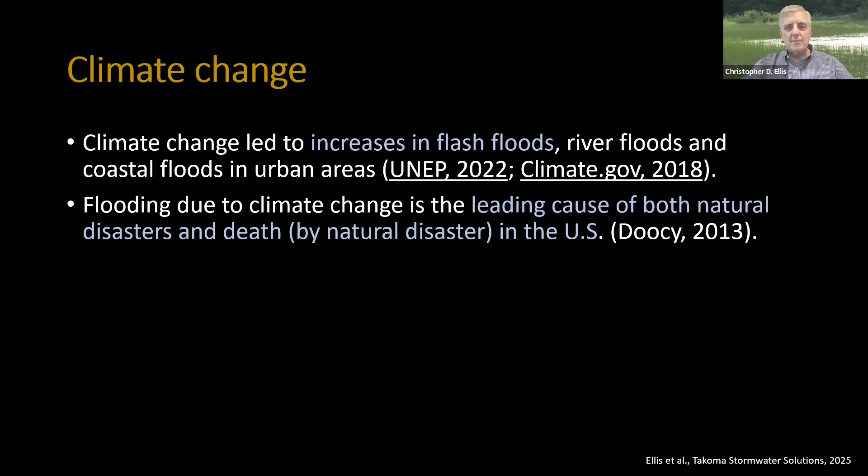So just some preliminaries that everyone is aware of: climate change is increasing the flash floods in the United States, and flooding is a leading cause of natural disaster and death by natural disaster in the United States, although heat-related is probably close to matching that at this point. And some other things: of the 34 storm-related disasters in the state of Maryland over the last 70 years, nearly half of those occurred in the last 10 years, right?

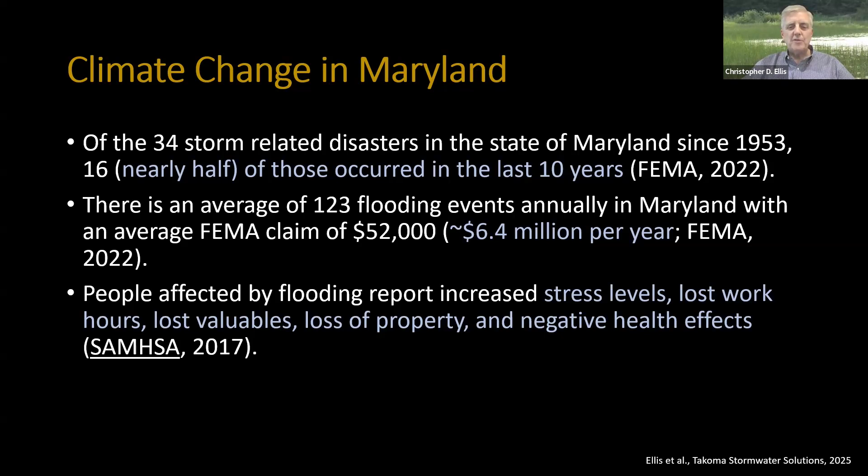So that's just talking about the fact that they're coming faster, and our numbers are going up in terms of precipitation. There's some numbers about how many FEMA claims there are in Maryland, as well as some of the reported effects, stress levels, lost work, lost valuables, and so on, that people report. So the work that I've been doing is taking modeling, in this case a model called WinTR-55, to just do some basic small watershed modeling for a community called Broadway East up in Baltimore. And to be able to take those numbers and visualize it so that people who are non-technical experts can understand it. Want to kind of bridge that gap, so that everybody has sort of an equal hand in the discussion.

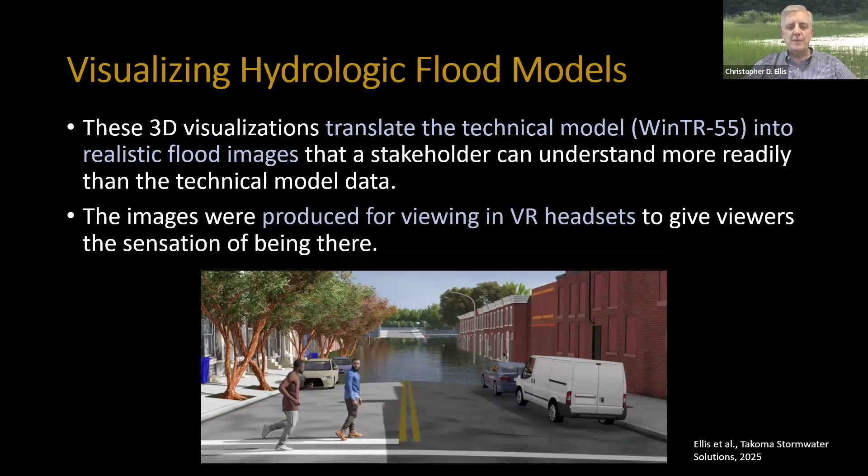And we're not just relying on a small subset of people to tell us what's going on. We believe that the 3D visualizations can translate the scientific modeling effectively, and that if you view it in a VR headset, which of course we can't do tonight, but I'll try to do my best to virtually do it. But using VR headsets to give people a sensation of actually being at these floods. It's different than seeing it on a screen or on a poster on the wall.

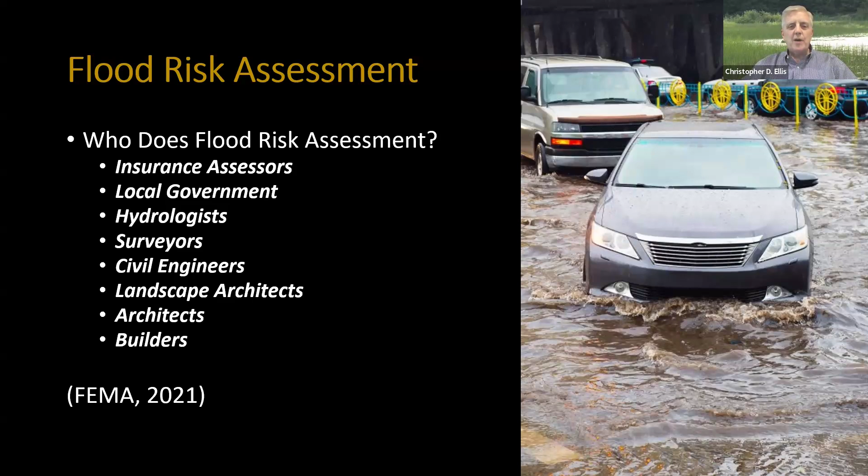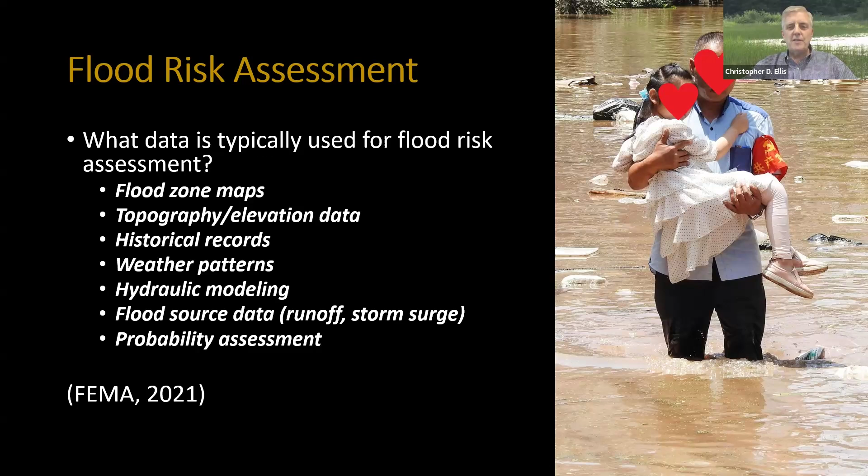So who does flood risk assessment? That would be insurance assessors mostly and local governments. The rest on this list are all professionals who are involved in doing the actual modeling for the flood assessment. And then what type of data is used? Typically flood zone maps, topography, elevation data, historical records, and so on. These are very helpful. And if you're a modeler, I do modeling, you really need all this information, but it's difficult for most people in the public to look at these things and really understand what's happening at the ground level or at the site level.

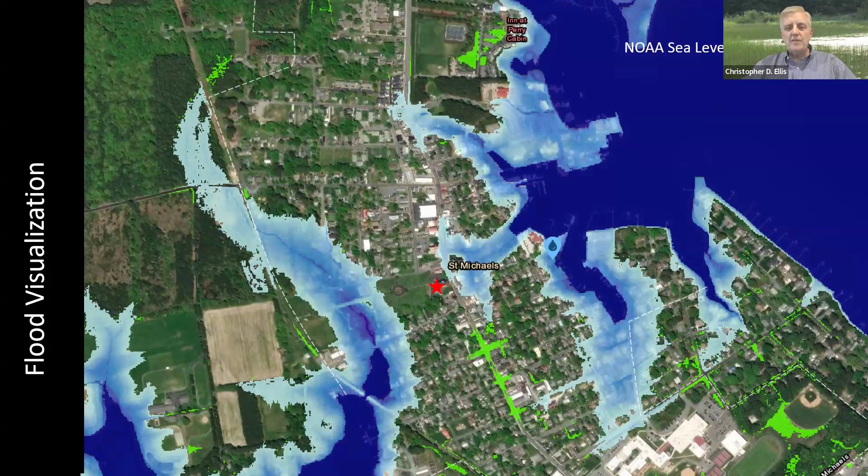This is flood visualization with the NOAA sea level rise viewer. This was taken down at one point, but it's back up again. So you can still see this. The problem with this is it's really good for regional level work, but at the site level, at a building, I mean, you can pick out buildings in here, but not really understand what's going on at the ground level. So that was St. Michaels on the Eastern Shore.

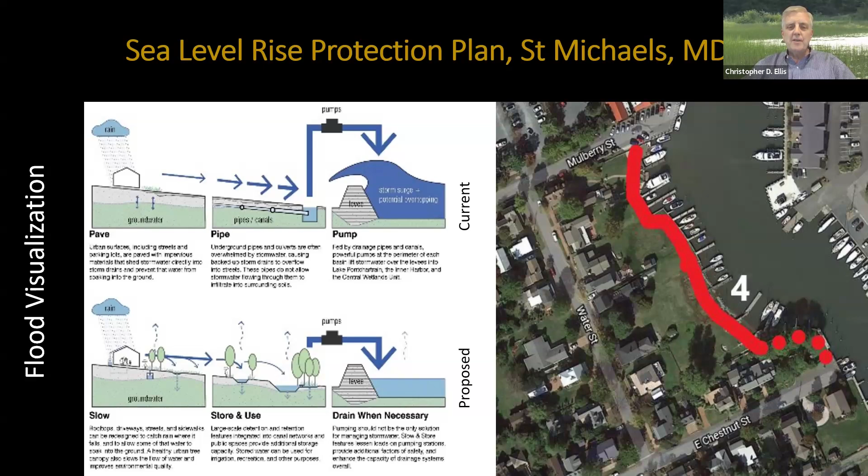And this is from a report for St. Michaels in 2020. And this is kind of the level of visualization that you can get from that report, an indication of where a berm would be. And you can see pretty high resolution from the air where the buildings are. And so you might recognize your backyard if that's your house on that street. And then on the left, these section elevations, which are pretty generic. They're really not designed from anybody's backyard here, but just to get a concept across. And they're helpful to a point, but still, I think, not as helpful as they could be.

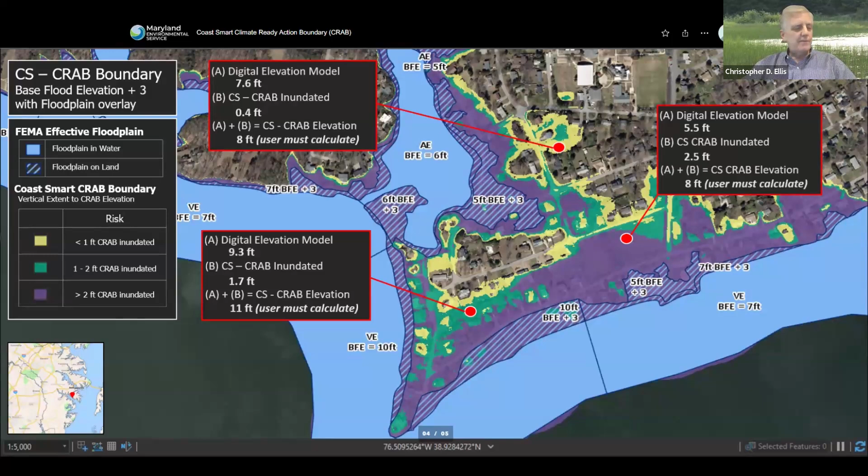This is the flood mapping that you can get from PG Atlas, Prince George's County online GIS viewer. I'm actually doing work on this area for them as we speak, and then this relatively new kind of mapping system with more information that you can get. But still, we're looking at a mapped image. And the houses are pretty small. And if you're good, you might be able to find your house in there if you lived in this area. But still tough to understand.

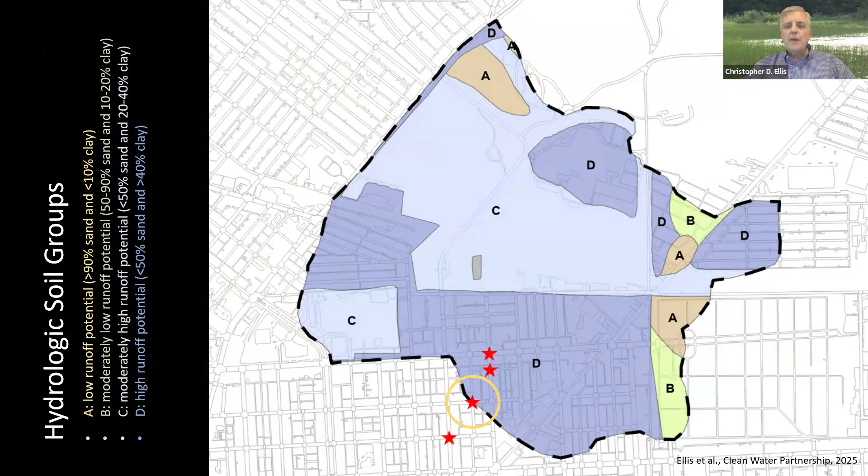So one of the first things you do is identify the soils, because the soils will tell you how much you can expect water to infiltrate or not. If it's sandy soils like the A soils, you'll get a lot of infiltration. If it's D soils, it's like clay. It's no better really than a parking lot. We won't get much infiltration from that.

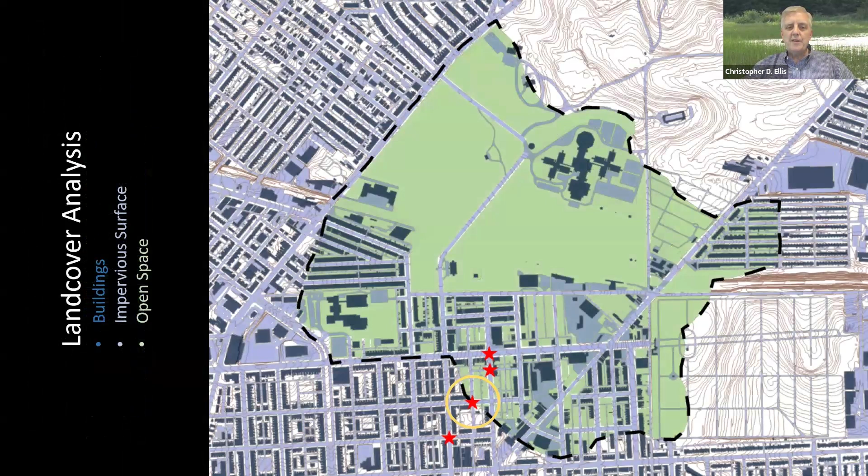And with that, we add the land cover. So you see buildings or rooftops in here, impervious surfaces, and open space. And those can help. This image here is the same as the previous one, except you can see an aerial photo behind it. And so it's telling you what the quality of that open space is. And with that, we can then start to plug that into this model.

So the model is looking for, if you can see across the top, A, B, C, and D. These are the soil types, hydrologic soil types. And then the land cover is all on the left side here. And what we need to do is figure out how many acres of this type of land cover is in this soil type and put those acres into this model. So it's a bit of a black box, but if you understand the data that's going into it, you can kind of understand how the model is working.

The next step is to identify the time of concentration. That's the amount of time it takes for the most remote drop of water to get to the confluence point where you have an outfall. So we want to know the longest possible time that it takes for a drop of water to get there. Because once that happens, as long as your rainfall is continuing at the same rate, the entire watershed's going to be saturated, and you'll be getting your peak flow coming through that spot.

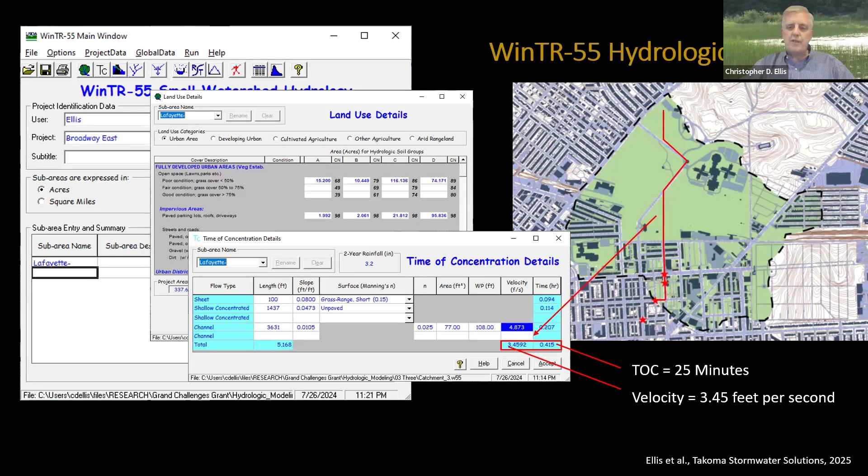A couple of things that you can get off of this is the time of concentration here is less than half an hour, this is in hours. It's actually 25 minutes, which is pretty flashy. And also the velocity of the water is 3.45 feet per second. If you've ever stood in water that's moving at 3.45 feet per second, you're not standing, actually, you're probably swimming.

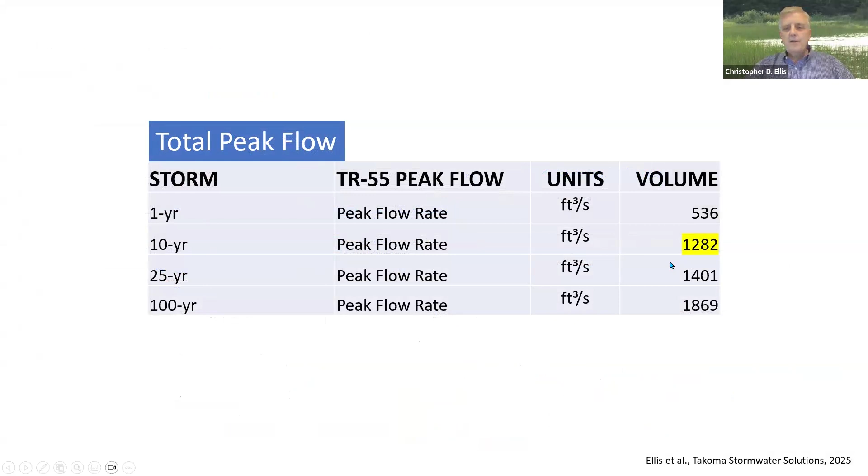But we do have pipes under the ground. And the pipe in this intersection is actually 96 inches, which is 8 feet. A grown-up can stand in that pipe and reach out their arms in both directions and not touch the ceiling or the walls, right? So it's a big pipe. It brings a lot of water.

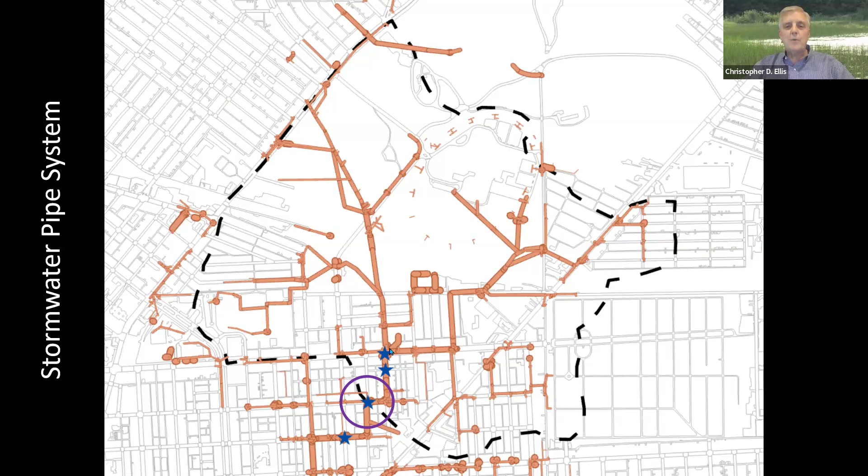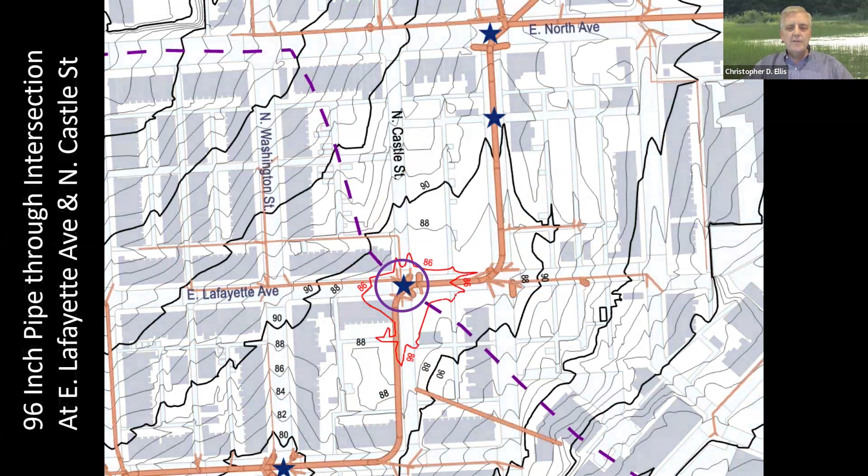The other thing about this intersection is it is a depression. So when you see a closed contour like this 86 contour, it's either going to be a peak, like a summit with the contour around it, or it'll be a depression. In this case, it's a depression, and the depression has to fill up before it can spill out and go down. So we zeroed in on this one because we knew it was particularly problematic. So there's the pipes underground and the intersection.

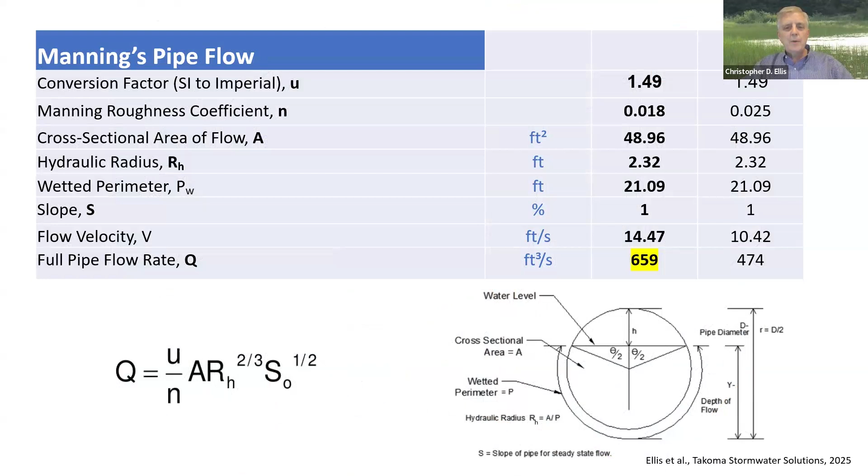And so there are a number of different ways you can model the pipe flow. This is the equation for Manning pipe flow. There's also the Hazen-Williams, and we actually used the Hazen-Williams. So this is a big table that really can be summarized as total peak flow. This is the modeling that we did at the beginning with 1282, plus the underground pipe flow, which came out to 738, is the volume that we're using.

And so if you subtract the pipe flow from the total peak flow, you can get the surface flow, which is in this case 543 cubic feet per second. Okay. And remember back that the velocity was 3.45, and it's just pure luck that these numbers are backwards, 2, 3, 4, 5, and 5, 4, 3.

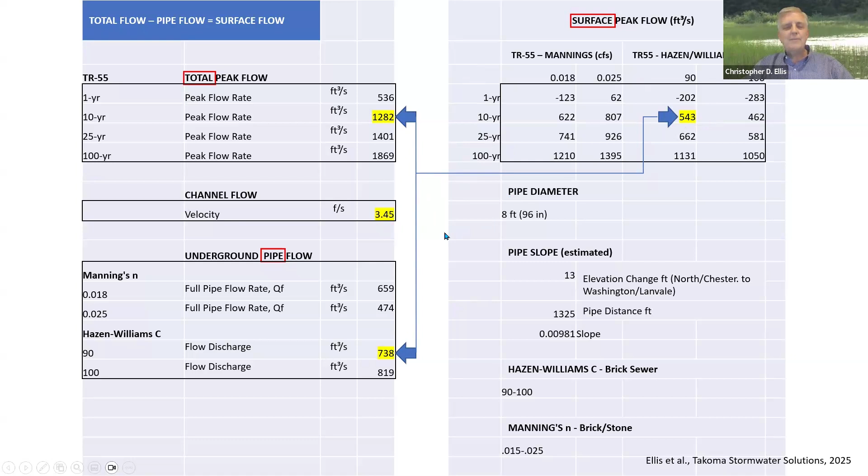I do this again, it'll never happen, but it's helpful to remember. So the next step is to figure out how does this translate into a floodplain? So you've got sort of a base at the top and then a depth to it. And so really all you have to do is take your peak flow in the simplest form, cubic feet per second, and divide it by your velocity in feet per second. That gives you square feet, okay? And that's the cross section that we're going to be looking for. The cross section here is 157 square feet, but I'm simplifying it down to 150 for the purposes of looking through the slides that are coming up.

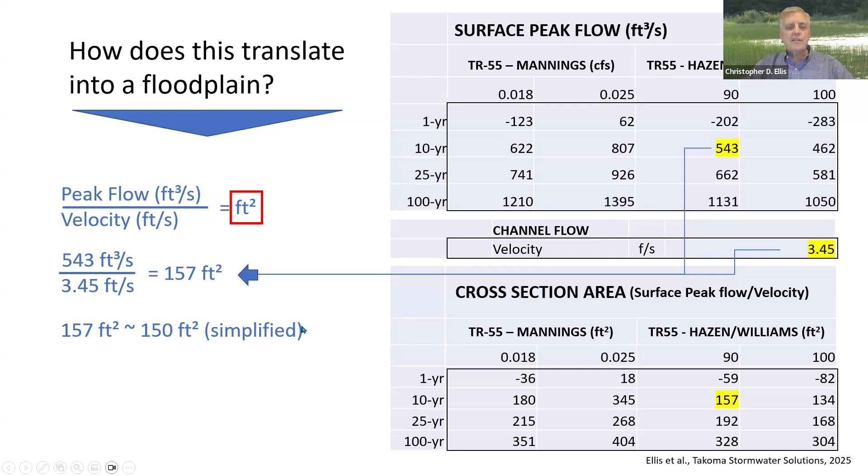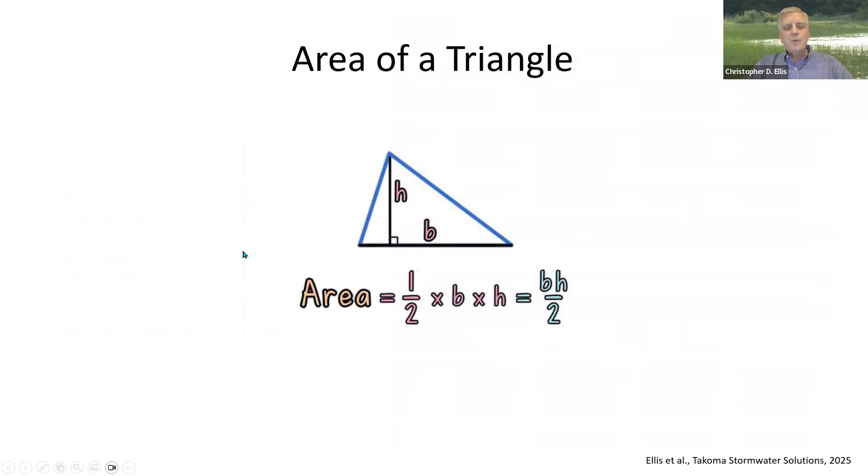So area of a triangle, for those of you who haven't been in a math class for a while, is 1/2 times the base times the height. And so we do this. Here's our base at 300 feet and our height of 1 foot with the area of a triangle, base times height divided by 2. That gives 150 square feet. So that's about the size of the floodplain that we're looking for in that neighborhood. Or if it's 150 feet across, then it would have to be 2 feet deep.

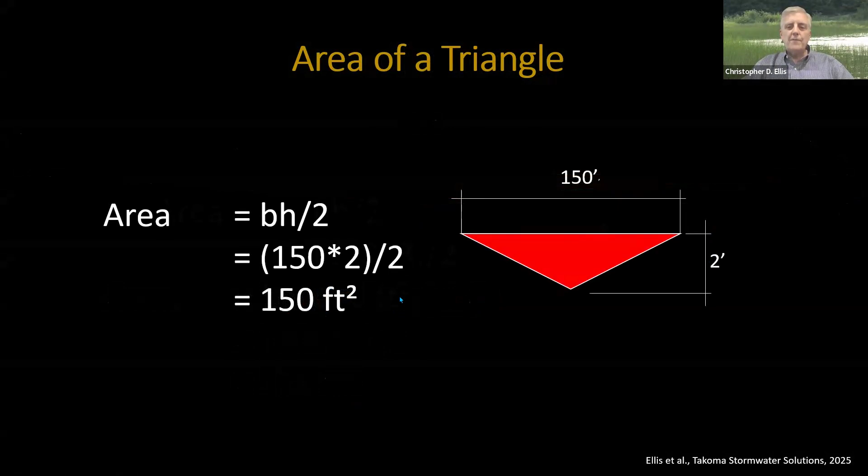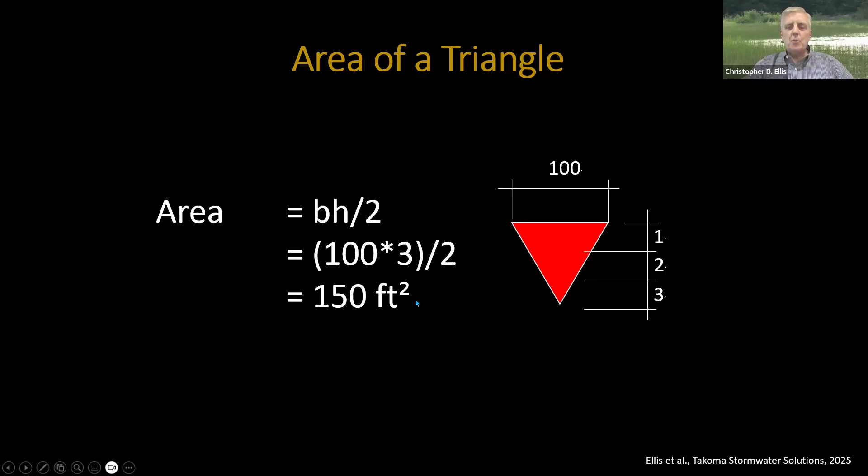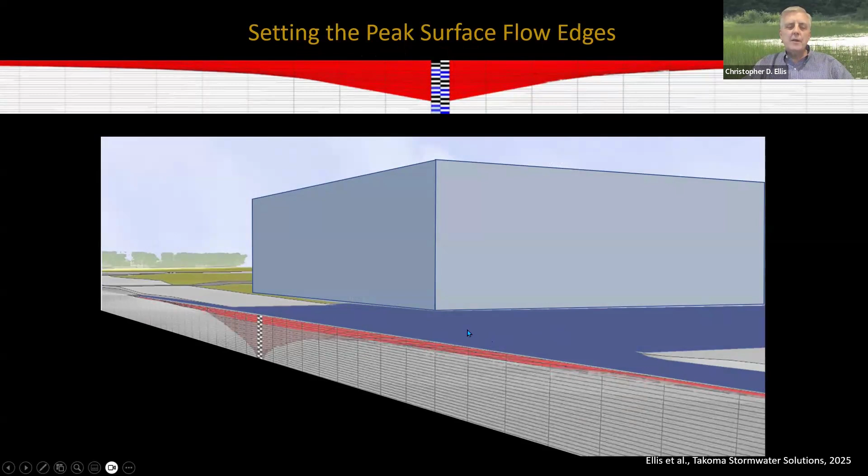And that would give us our 150 square feet, or at 100 feet and 3 feet deep, we would also be at 150. So that gives you a sense of how your water column going through might change a little bit. And you can then use that to build a graphic like this one that can help you as you move it through your modeled landscape to get close to where those tops are, and the top of the water. And in reality, you really need to take a complete cross section. So this is an actual cross section from the model that you'll see in a second. And this adds up to 257 square feet.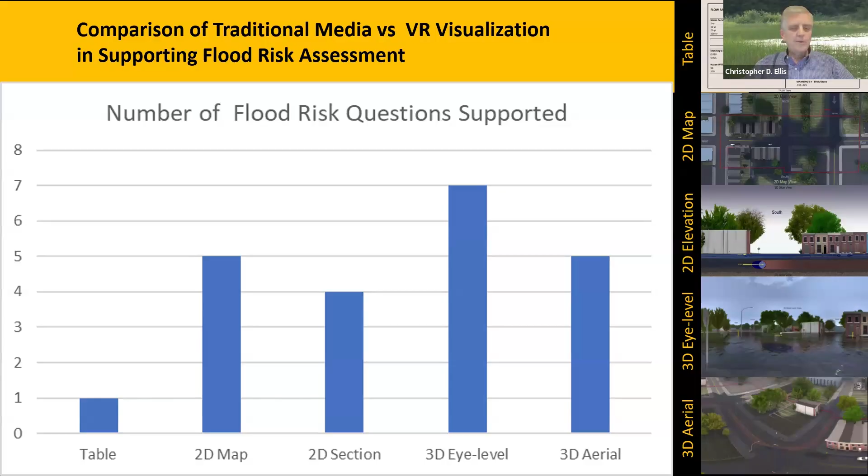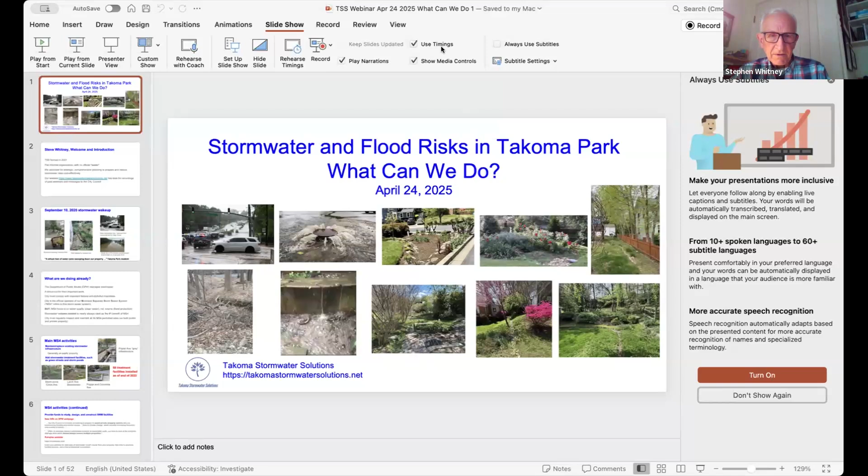Okay, thanks very much, Dr. Ellis. I hope people appreciate the complex data that is handled in one of these models, and it's important for, I think, our city to understand that if we wanted to do something like this, collecting data is very important. But the beautiful thing is that this is technically possible. It's been done in Baltimore. It could be done in Takoma Park.

I know that some people on the city council, for example, have said, I wonder what it would look like if we had a 100-year storm. We know that it is possible to do this. It's just a question of making it happen, funding and so forth.

Let's see. Are we able to fill the screen yet? Or I guess, okay, I guess we're here where we want to be. All right. We're going to just wind back a bit and just again welcome you to the webinar. And Rob, can we just move on to the next slide? Okay.

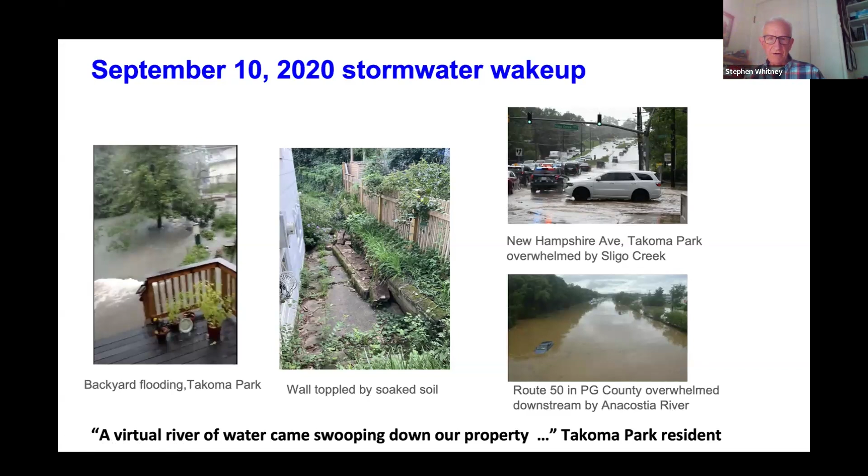Rain expected to drain through storm sewers gets blocked for various reasons and ends up going downhill over roadways, yards, parking lots, and wherever the surface is saturated or impervious. Could I have the next slide?

Our main MS4 activities are maintaining existing stormwater infrastructure. That's the gray infrastructure that we hear about. There's a picture of a little detail of gray infrastructure over on the right. This is Poplar Avenue under a part of the street that I didn't know had a storm sewer, but there it was. It's being worked on right now.

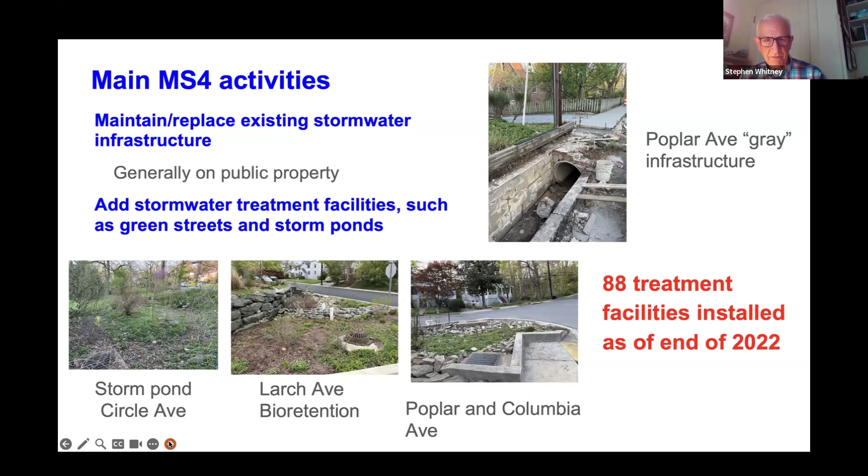But the city has installed a lot of treatment facilities that use some nature-based processes, and I've just shown you a couple of them. They've put in 88 of these, and that's a lot of work. At Takoma Park, the Department of Public Works has been very proactive with this approach. Could I have the next slide, please? Now, the problem with that approach is that it's very expensive.

TSS does not have the solution, but we do believe that some changes in city policy are happening that are very promising. New information on the webpage says that the city is looking at addressing stormwater issues on private property. And even better, they're exploring ways to support projects on multiple properties. That way you can cover more ground with a single project. That's a breakthrough because it may incentivize neighbors to collaborate on solutions. And one of the themes that you'll hear through the presentations tonight is the importance of collaboration.

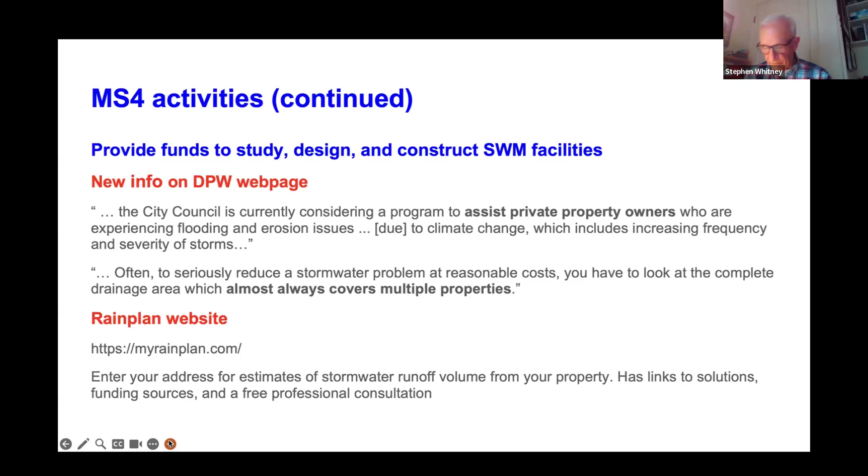The city has also worked with an organization called myrainplan.com. You can look at that rain plan website. You can enter your address. You can get an estimate of stormwater runoff from your property. And it also provides links to solutions, funding sources, and a free professional consultation. TSS really has not evaluated that in any depth, but it's available. Okay, could I have the next page, please?

Something to explain is that our city covers stormwater. The county is responsible for flooding. I don't really know what the specific legal definitions are, but the one thing that we do know is that the county is collecting really important data that would be of use for the city for a comprehensive stormwater management plan. And that's one of the things that TSS has asked the city to get to work on.

The city has done a lot of work on individual problem sites. That's important. The proactive 88 nature-based sites, bioretention sites, and swales and things like that. But we don't really have a plan, and the kind of data that we get from the county should be a really big plus for us.

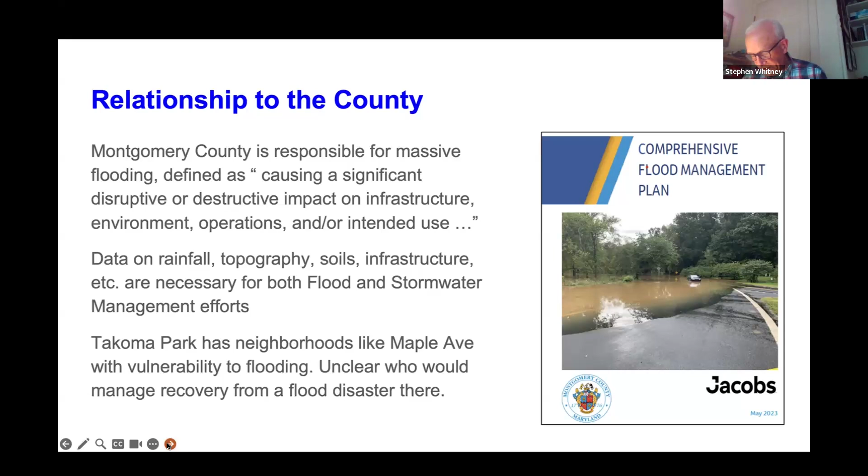Now, let's move to a presentation by Mike Lynn. Mike is an ecological designer and founder of Eastern Ecosystems. This is an environmental consultancy. Mike has years of experience. He's an articulate advocate and practitioner for nature-based solutions, and he's going to cover the general principles of nature-based solutions and how that intersects with the gray infrastructure that is the traditional way of dealing with stormwater. So, Mike, let's go to the next slide and let Mike take it from here.

Mike, can you get online? Hi. Yep, I'm here. Does everybody hear me okay? Yes. Fantastic. Perfect. Well, thank you for the warm introduction. Happy to be here. Excited to be here. Although that is going to be a tough act to follow, Dr. Ellis. That is some very cool stuff that you're doing there, and I look forward to seeing how that continues. And I know we're a little short on time, so I'll go through this a little quicker, because if you gave me all hour, I would nerd out on this for the next 3 hours. Go to the next slide.

So as you said, ecological design, nature-based solutions, what does that all mean? That means at its base, we look to the natural systems that existed long before we started building and say, okay, not to anthropomorphize nature, but how has nature solved these problems? Because chances are nature's been here a long time and has a very effective, efficient way of doing that. So can we take those natural patterns and processes that nature uses and either copy them, build up ecosystems in our communities, or at least take the processes and patterns and institute them into some of the designs that we work with? Next slide, please.

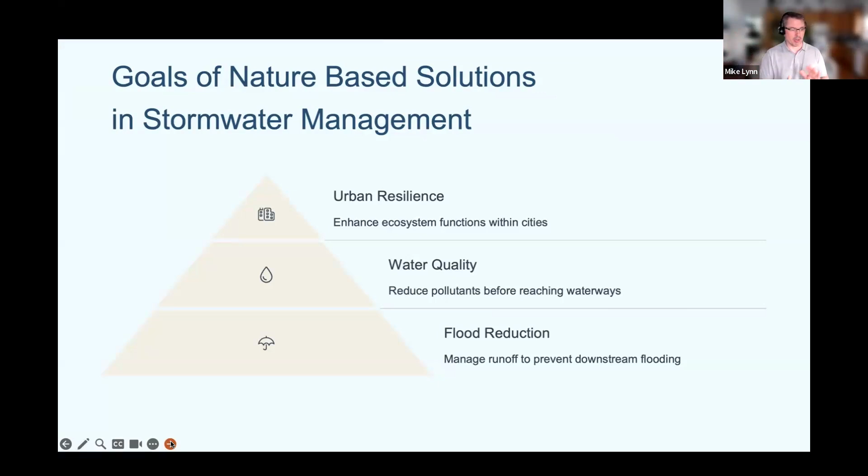Next slide, please. So as I said, slowing it down, flatten that curve. Dr. Ellis showed that really hard spike in Baltimore and the flooding that results from that. So it's not that we're necessarily removing all that water, it's that we're slowing the time that it takes to hit the waterway and spreading it out, increasing that surface contact, and then trying to soak it in, which can be challenging in Takoma Park because you have a lot of clay there in certain areas.

Those soil types Dr. Ellis alluded to, great for building foundations, not so great for infiltration. So that's something we'll talk about right at the very end, is what does that look like?

So just why we're going over this now, very zoomed out: Missy Lauterbach's going to be talking about BMPs, best management practices, both a technical term. You'll see that sometimes if you nerd out into the technical literature like I do, but it's also kind of a common term that just represents rain gardens and bioswales and permeable pavers and a whole litany of tools we have at our disposal. So I kind of look at those as the tactics. Right now, we're zoomed out to the strategy level and saying, okay, what are we trying to accomplish?

Because that will facilitate as you plan as a community, as an organization, as you talk with, whether it's contractors, whether it's your government officials, whether it's NGOs, because there are a lot of grants and funding available. It'll give you that kind of common language. And by having that zoomed out, knowing what we're trying to accomplish, then we can select what may be the best tactic or BMP for your particular area. Because then we can zoom in with Missy's presentation and look at what can we do on individual properties. Next slide, please.

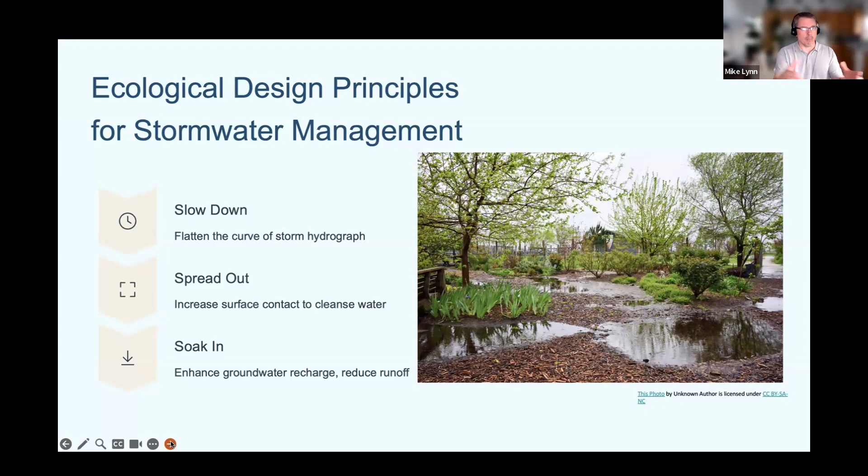So as I said, flatten that curve. My wife is a nurse practitioner, and during COVID, we heard flatten the curve, flatten the curve. The goal was they knew they were going to get so many patients. What they wanted to do is spread out the time where those patients showed up at the hospital. Because if they showed up at one time, it would overwhelm the system; the hospital couldn't handle it. If those patients were spread out over weeks and months, then they could see every patient and treat.

And we're doing the same thing with stormwater. If we can slow that water down, if you'll forgive the pun, let it walk off the property instead of run off the property, that's ideal, because then it has time for those streams and those waterways and the gray infrastructure to take the excess away. So we're not causing that flood. So it slowly moves down that watershed and hits the storm sewer system or the creek or whatever that may be, but not all at one time. Gives it time for more infiltration. And the way we accomplish this is by the BMPs that Missy's going to talk about in a little bit.

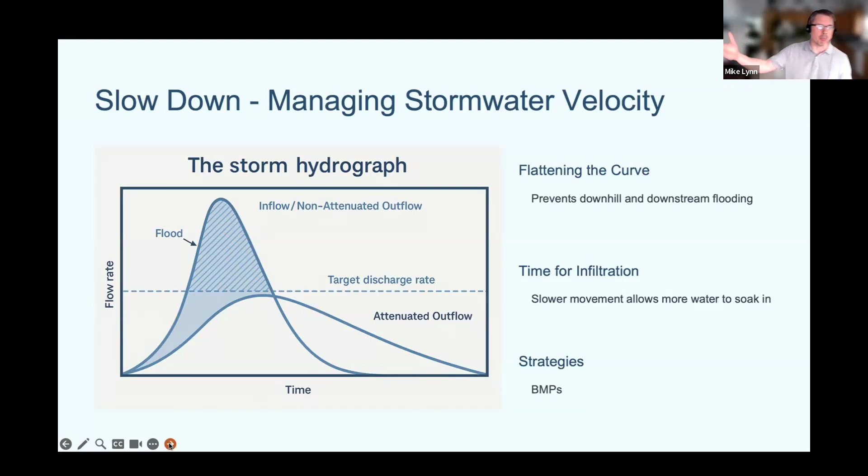Next slide, please. So spreading out, if we can increase that surface contact, that does a number of things. By spreading that out across the landscape or within the BMP, that allows the gray infrastructure... So what gray infrastructure is designed to do is take that water from the problem spot and move it somewhere else, which it does very well. But that also concentrates that flow. By spreading it out, we slow it down, and we reduce that concentration. If you dig a hole, pour 5 gallons in, it takes a little while for that 5 gallons to disappear. If you spread that 5 gallons out across your yard, that 5 gallons disappears fairly quickly. So that's what it's doing.

As it flows over the surface, it's also removing pollutants, sediment, that type of thing. And if we have it on the surface, we have it spread out as it moves slowly down the hill, or slowly into the stormwater system, we're lessening the risk of failure, because with those pipes, with those culverts, with gray infrastructure, there's the risk of failure. And we still need it.

I'm not advocating to get rid of it, but take, for instance, if you have a heavy storm, it washes branches and some debris, clogs one of those pipes. Now you have that pipe back up. Now you have localized flooding, and that water finds somewhere else to go, because it's still going to go downhill. But now maybe it's eroding, maybe it's going into a structure where you don't want it, damaging roadways. So by spreading it out higher on the landscape before it gets to the gray infrastructure, you're reducing the risk of failure. And again, we do that through BMPs. All right, next slide, please.

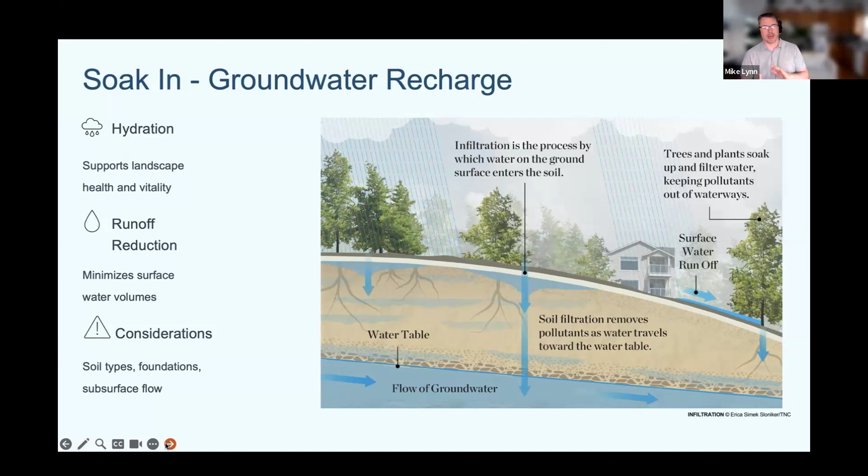But the other thing this does is hydrate your landscape. So you're not having to irrigate, you're not having to water your lawn, you're not having to water your trees as often. So this has a number of what are called ecosystem benefits or ecosystem services that these natural systems can help provide. Next slide, please.

So you have gray and green, and you've heard us talk about both. Gray infrastructure, think of that as the engineered, the built environment. Green infrastructure is these natural systems, but it's not just that side or this side. There's also the spectrum, and Dr. Ellis alluded to this as well, where you'll have systems that can be natural functioning, but within an engineered system. For example, sometimes you'll need that in an area with high clay, because you'll need a certain type of medium for that water to infiltrate.

And then if you go to the next slide, please, you have a hybrid approach where these things can overlap. So it's not an either or, it's a both and. The green infrastructure supports the gray infrastructure. They can be combined into hybrid systems, and these systems work together. And the other benefit of that is you have kind of an adaptive strategy. So as you have more development, or as you have more storms, these green infrastructure systems can be adapted to fit that. Next slide, please.

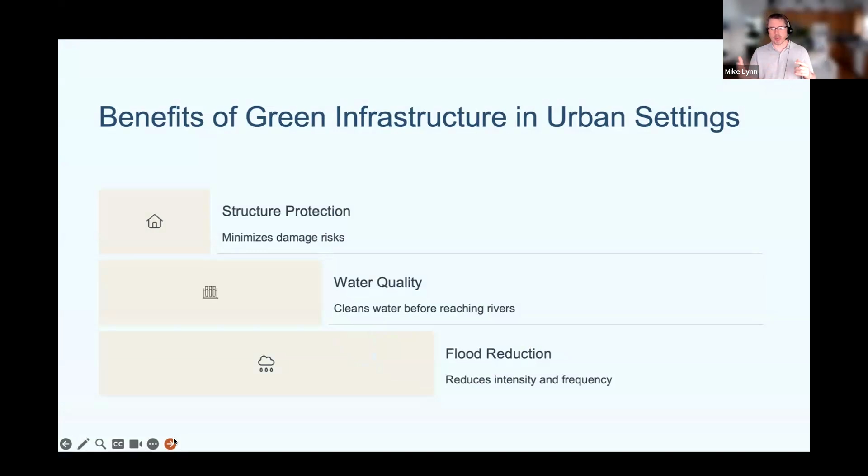As we're obviously here for flood reduction, I won't go into great detail because we do want to get to Ms. Lauterbach's presentation, but there's the obvious things with protection, water quality, and flood reduction. But if you go to the next slide, there's some maybe less obvious ones where you have cost reduction. A lot of times, green infrastructure can be significantly cheaper than gray infrastructure. And again, it doesn't mean you have to have either or. You can get that green infrastructure, which means now you don't have to build your gray infrastructure quite as large, because you're planning on the green infrastructure taking care of it.

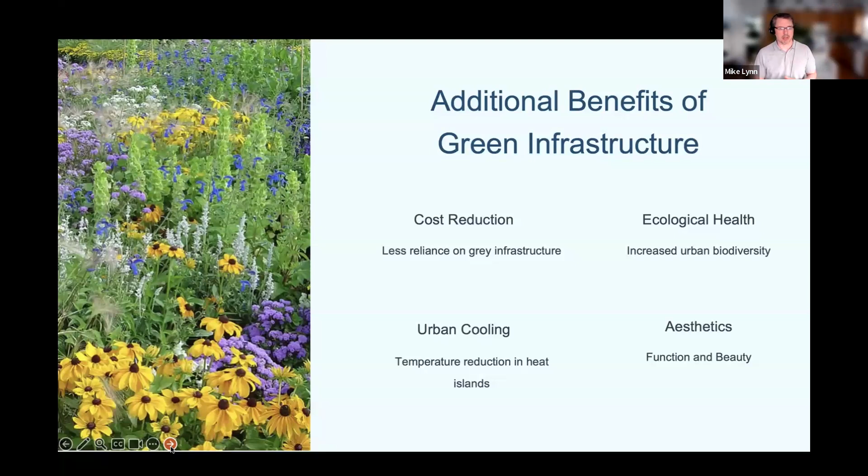You have the ecological benefits of it, the aesthetics. These things can be incredibly beautiful, raise your property values. There's a win. And then one thing that's often overlooked is, especially when you get into trees, woody perennials, shrubs, that kind of thing, you have the transpiration that occurs, reducing, you may have heard on the news, the urban heat island effect. Well, this can counter that and actually cool that area, not only shade it, but also cool it through natural processes. Next slide, please.

So in conclusion, on my side, really the best way of approaching this is, again, not an either or, but a both and. How can we do that on individual landscapes, but as a community, planning these things all together? So coming up with a plan, because one, that really makes these more effective. Maybe you have a BMP that, if you get a very big storm, overflows. Where's that outfall going to go? Is it going to go in your neighbor's yard? You don't want to move a problem from one place to another. By community planning, you can identify areas where, hey, these would be great areas for certain types of BMPs. Maybe space won't allow that.

But in addition to that, you can get funding. A lot of times there are grants available. And as a community, you can get large funding to do these across the landscape. A lot of people, when I've worked with BMPs in the Anacostia Basin, they're like, hey, man, I've got this postage stamp size lot. I don't really feel like I'm making an impact. But if you look down the block, there's 10 other people doing the same thing. And if you aggregate that across your community, you can make huge, huge impacts.

So that is all I have.

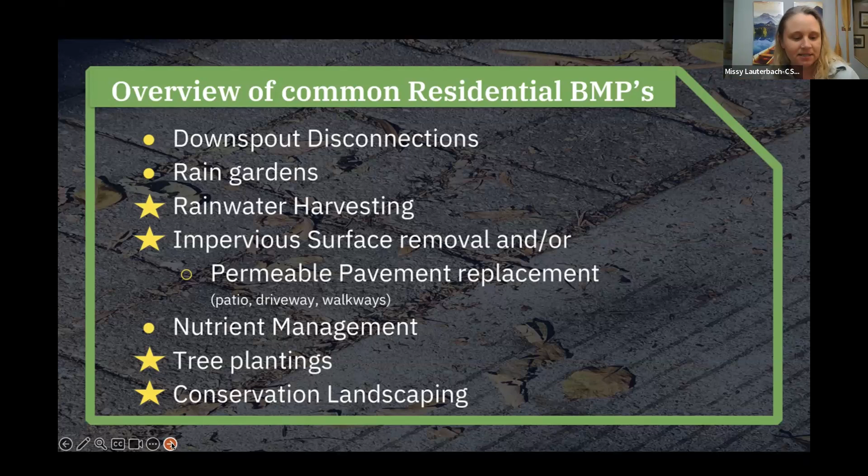Another important part about rain gardens is they have engineered soil mixtures, which are usually about 12 to 24 inches in depth. So a rain garden is not going to have just the soil that is naturally occurring there. People hear engineered and they think, oh, it has to be plastic or something. No, it can still be a natural source, but it's just probably not the source that is originally sitting right in that bowl. Another thing we want to think about is factors that say if it's good for your property or not, things along the lines of the topography or the slope of your property.

Another thing that's really important, and it was touched on already, is the existing soils. Clay does not like to drain water. So if you have a ton of clay right under your rain garden, it might not be a great place to put a rain garden. And then a separation between the bottom of your rain garden and the groundwater underneath. You don't want a rain garden that's going to sit right on top of a water table. That could really affect the quality of the water under it.

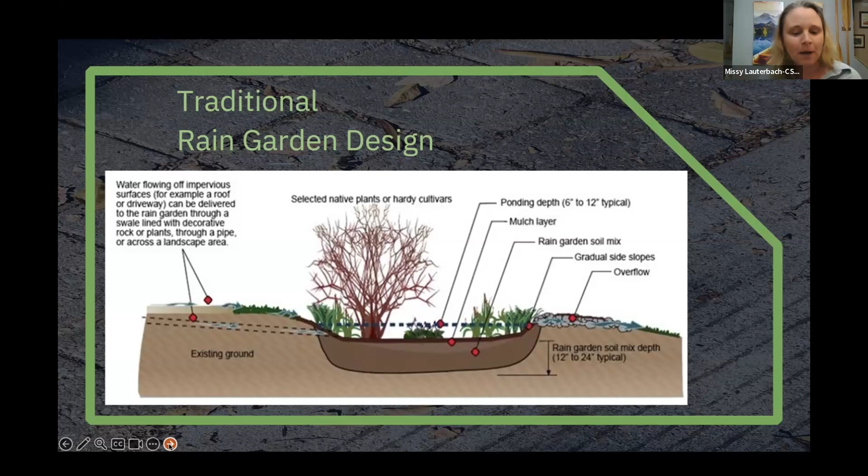Next slide, please. So if we look at some alternatives to in-ground, if your property is not great for in-ground rain gardens, there are some really cool alternatives out there. If done well, they can act as a bioretention practice, just like a rain garden. So it'll actually help clean that water as well as slow it down. The stormwater coming directly from your rooftop can be managed from these foundation and box planters.

They can also be a nice alternative for small properties. So these can fit on back patios often. And they're also great for sites with slopes sometimes. And then ultra urban properties that are surrounded by hardscapes. These are also a really nice alternative.

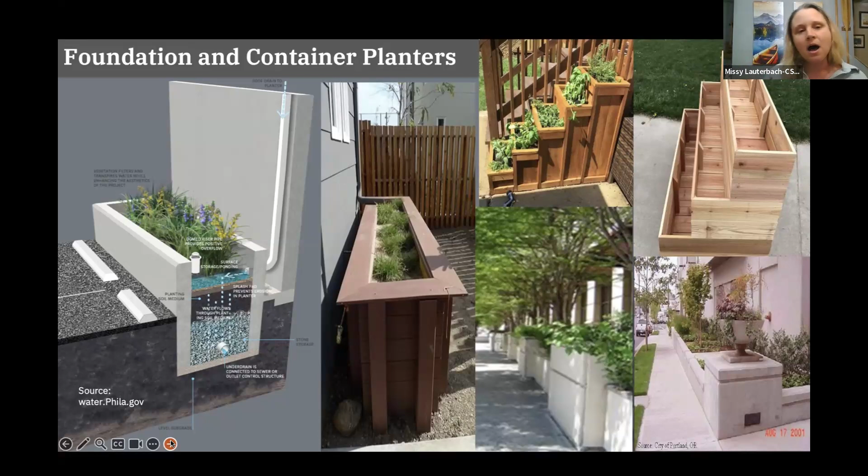Next slide, please. So some of the key designs: if we want it to be a true bioretention practice, we want it to filter that water, not just slow it down, but we want to be cleaning that water as well. So some of the things we need to think about: if they are against a foundation, which a lot of the times in cities and ultra urban places they will be, they need a waterproof membrane between that foundation so that water isn't seeping in.

And then our overflows and our outlet drains also have to be directed away from the actual foundation. That's another really important thing. Oftentimes these will hook back into the municipal drains, which is fine if they're already permitted for it. If they are not, that is something you do need to get permits for, so keep that in mind.

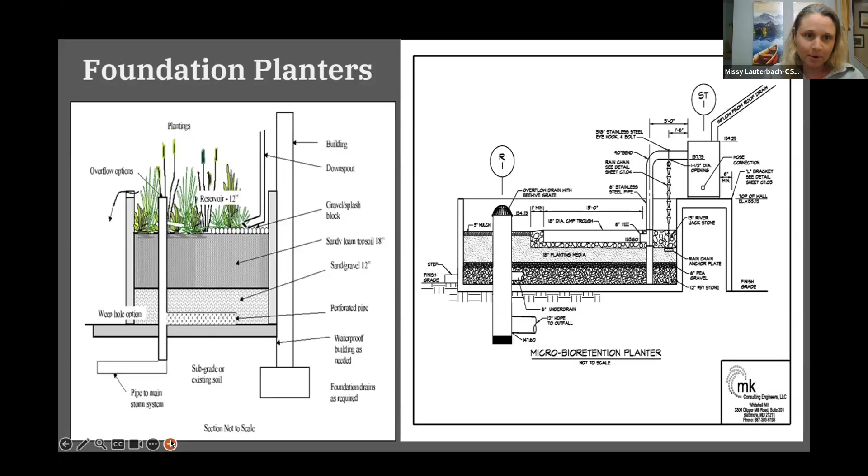Next slide, please. All right, so now for the remainder of my part of the presentation, we're going to talk about our Bubba's Award winners. Bubba's stands for Best Urban BMP in the Bay Award. The purpose of this contest is to spotlight and celebrate some of the innovative work that's been done around the Bay and to spark new and creative ideas for future designs.

We just wrapped up this year's contest, so the next one won't be till 2027, which leaves plenty of time for new projects. There's also a cash prize for the overall winner, so that's a little extra incentive to submit a project. So if you come up with a design for your area, please think about submitting one in a couple of years.

The first project that I wanted to share was the headquarters of the Rivanna Conservation Alliance, which is located in Virginia, not in Maryland. When they first moved to this building, they quickly realized that there were quite a few factors that would make it impossible for them to have a traditional rain garden, and a less ideal stormwater management solution for this specific site. Hardscape removal was also not going to be feasible at this site, so they had to get creative. Next slide, please.

So this is nicknamed bioretention in a box. These planters actually manage all of the rooftop runoff for the 1,400 square foot roof of this building. The taller planters actually have underdrains and overflows that flow out into the lower level boxes.

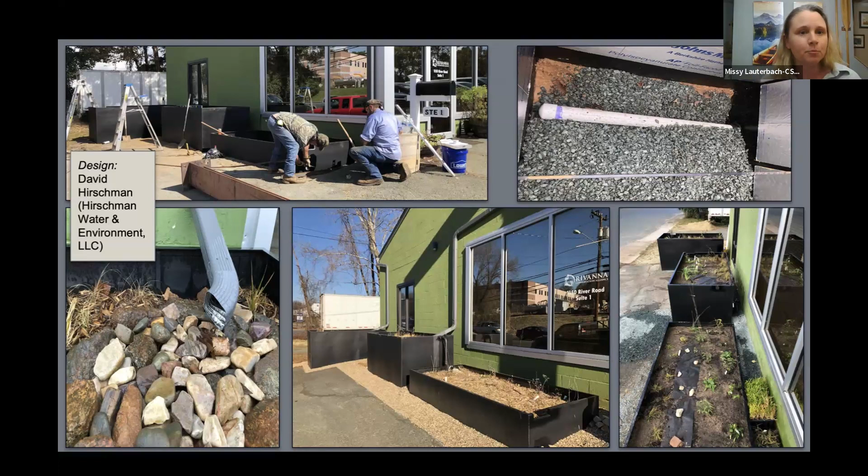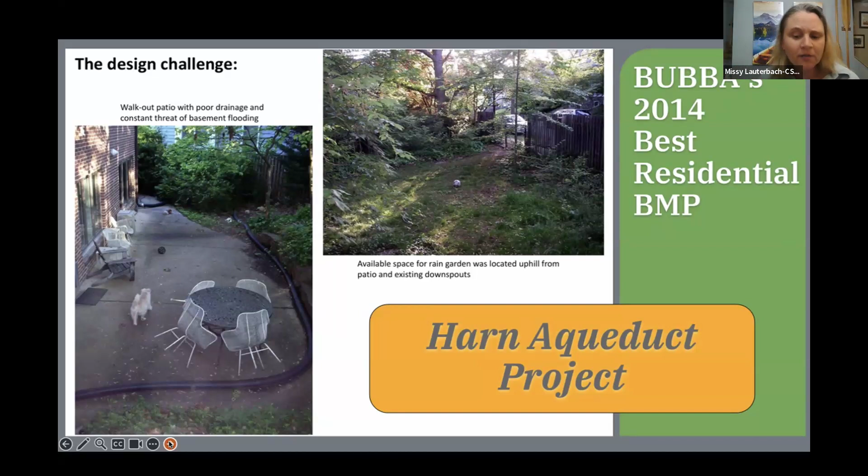Next slide, please. This next one I'm going to highlight is actually a creative solution to a property that has a significant elevation change. Next slide, please. The homeowners were continuously concerned about their patio and basement flooding and wanted to reduce the runoff coming from their roof. Unfortunately, their house is located downhill from any suitable space to install a rain garden. If you see in the bottom left photo, they were channeling the downspouts across their patio, attempting to redirect the rooftop runoff. That's what those long black tubes are in the photo.

Next slide, please. I apologize, there's a lot going on in these slides and I'm moving really quickly, but as Steve has mentioned, you guys can watch the recording later and look at more details if you want.

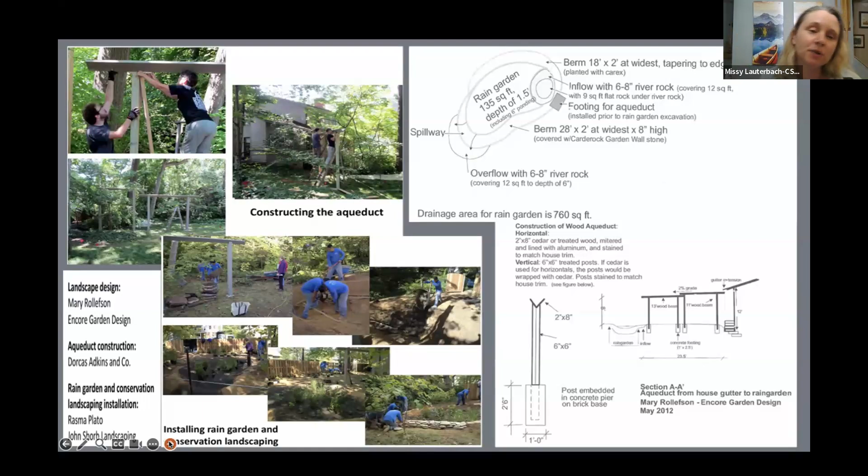The design solution for this property was to build an aqueduct leading from a gutter extension at the top of their roof in the corner uphill to a space where they actually installed a rain garden. Next slide, please. The photo on the right shows the completed aqueduct as well as the rain garden, which is that crescent-shaped rock area right there in the middle of the photo, and some of the conservation landscaping, which can be seen along the right side of the stepping stones.

The photo on the top left shows the house in the background of the rain garden. The patio from the very beginning of the slides here is actually just downhill from where that is. And the bottom of the photo on the left is showing the aqueduct with water flowing.

This project was actually completed just days before Hurricane Sandy hit in Maryland in 2012. And the owners were very pleased to report that there was absolutely no flooding on their patio whatsoever. And they actually didn't even have any standing water because of this redesign. This project is actually located in Montgomery County, and part of the funding for it was paid for by the Rainscapes program.

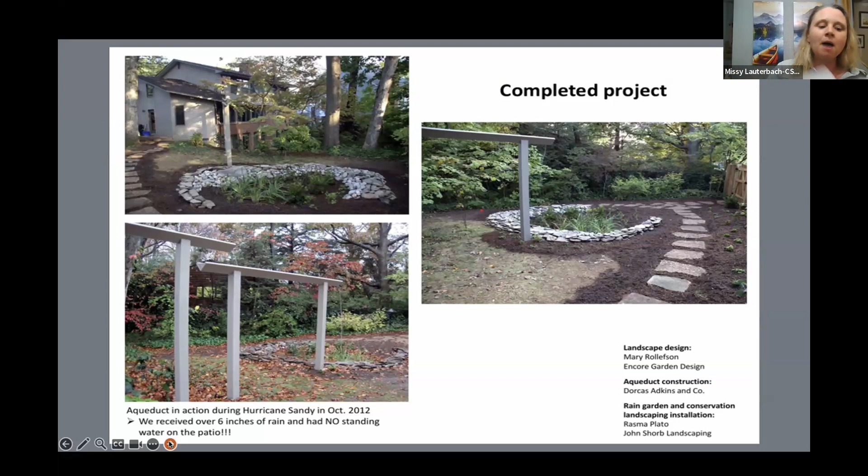Next slide, please. All right, so now I'm just going to highlight a little bit of a community project, not a municipal project, but a community project to emphasize the importance of looking at that wider area, a little bit bigger than just your backyard, kind of what Mike was talking about.

Next slide, please. This community was built in Anne Arundel County in the 60s and originally had no stormwater management on the property whatsoever. In 1974, a gray infrastructure retrofit was installed in this utility corridor that runs between the buildings, as seen in the photo on the left. Even though this alley was not being used by vehicles, you can actually see there was a great deal of soil compaction from foot traffic, and there was also evidence of a lot of erosion as well. The community members, along with the HOA, applied for a grant through Chesapeake Bay Trust. It was the Unity Gardens program.

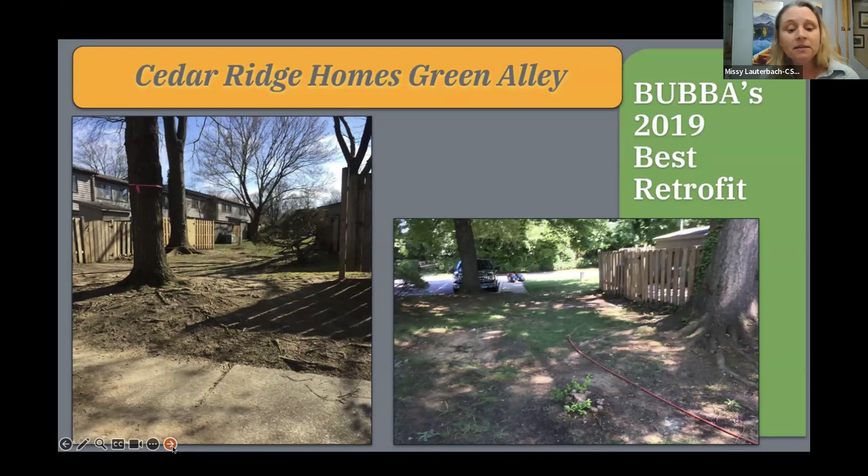Next slide, please. Some of the site challenges for this project were the numerous underground utilities and mature tree roots that occupied this small space. Most of the excavation work was completely done by hand, and the planting depth was actually reduced when they started to get in there. The design team integrated a stepping stone path through the meandering channel of conservation landscaping and bioretention areas to minimize future compaction because they knew there was going to be continued foot traffic.

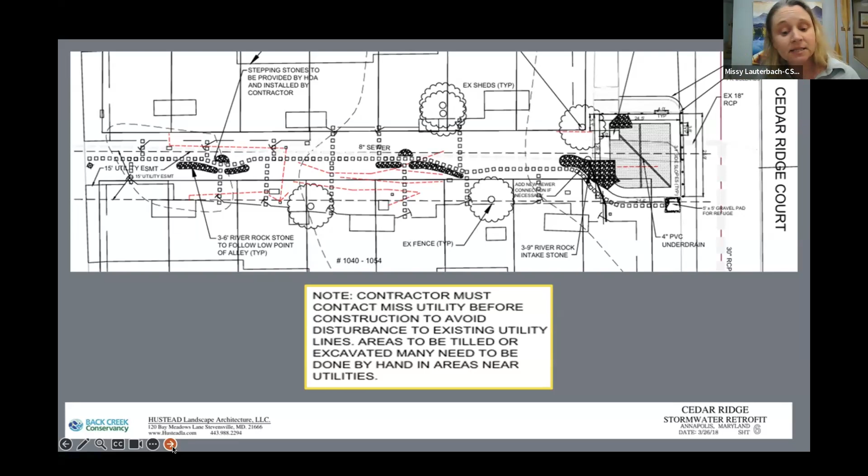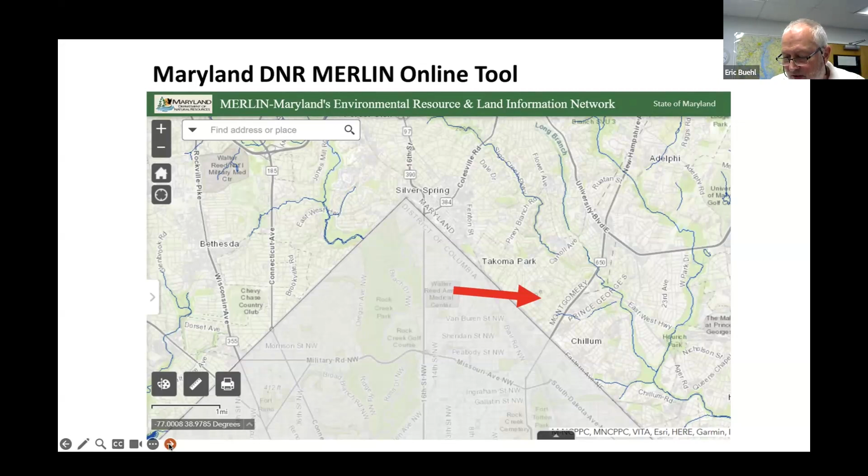So I was really surprised that my go-to tool is not really as good as I thought. So next slide, please. So I immediately start falling back looking for older maps and things like that. So this 1900 topographic map, along with one from 1861 that had some of the streams from the district delineated on them, was what I was looking for.

And so I noted where Carroll and Ethan Allen are on there, so you've got kind of some perspective. And again, that red arrow is in about the same location. Oddly, it used to be Sligo Branch, not Sligo Creek. You can take that up with the people back 125 years ago.

But what I noticed is now you see this stream coming from Sligo up towards the arrow, okay? And it branches off 4 more times. You'll see that little pencil thin blue line going under Sligo Mill Road. Also, if you look at where Carroll Avenue is, now you go just north of there a little bit and you can see the stream that used to be where Maple Avenue runs. Okay, and this is all leading to something in just a minute.

But what it brings up is what they call the concept of buried streams. Okay, and that's just simply that as the nation developed, cities grew, we just kind of filled in streams in some places. They might dry up a little bit, they might be seasonal, they just put debris in them, they may have put pipes in some of them. Some of them still exist, but may not be quite as large as they were. So they were piped for reasons, roads, utilities, things like that.

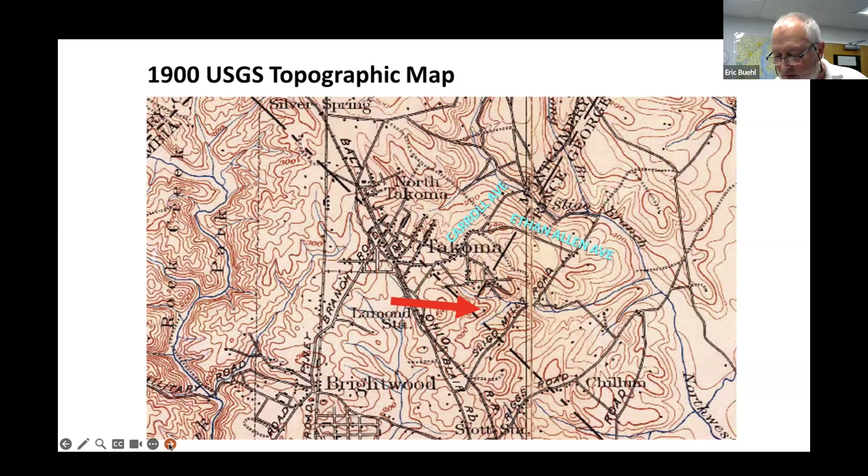You know, what's unusual about this is the way that all the water is trying to get down to Sligo Creek. This doesn't account for the rainwater that starts on your rooftop, what goes down your driveway, what enters the street, what then moves down to the storm drain system, and then ultimately tries to get down to Sligo Creek. So, you know, this is just kind of the larger channels that water will try to move.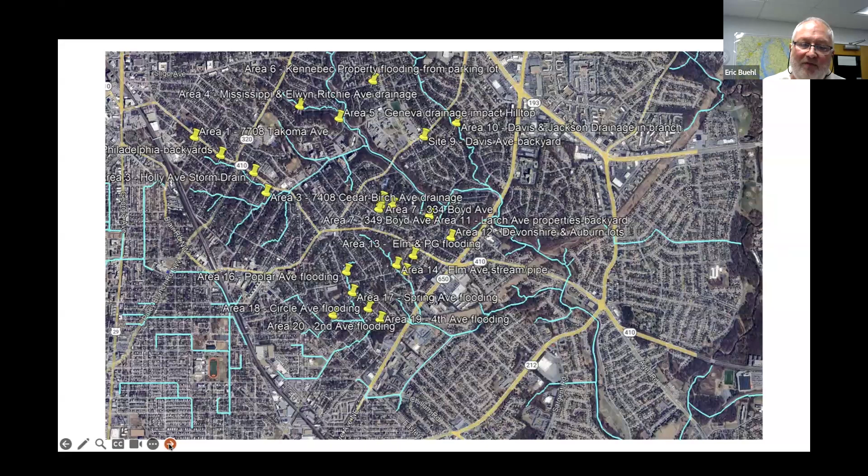So you'll get a copy of this. I'll email it to Steve. It'll be a JPEG format. You can zoom in a little bit more and take a look at it. But some of these ultimately became the 10, what they called their project sites. I focused on these 20 because there was a detailed explanation of the type of flooding that was occurring. Okay. So, you know, in the plan, they noted that there was flooding that was occurring as overland flow.

Some of it was going down the street and jumping the curb and then going into property. Some of it was undersized pipes, clogged storm drain inlets. There were a variety of issues, but there were also some where people were like, my yard gets wet, or this water just kind of comes from nowhere. And so that's what I was really getting interested in.

Next slide, please. Okay, so this is the final zoom in, and then I'll move on to some other stuff. Take a look at the two lower arrows there. At the top, these are examples of where in the plan they talked about surface runoff coming from a parking lot and down a hill into somebody's property and things like that. But if you look at those two arrows at the bottom, some of those just really eerily line up with the stream channels. Now, again, some is storm drains, some are open channels that still exist.

But there are most likely areas in there, because the neighbors are all standing there explaining to the folks from LIDC and the city that my yard just gets wet for no reason, and there apparently was no real channel there. So something's going on. And I think this is something that can become a resource for Takoma Stormwater Solutions and the city to better understand where some of the flooding is occurring and possibly why, and that there may be linkages to groundwater down in these areas, as opposed to just simply surface runoff.

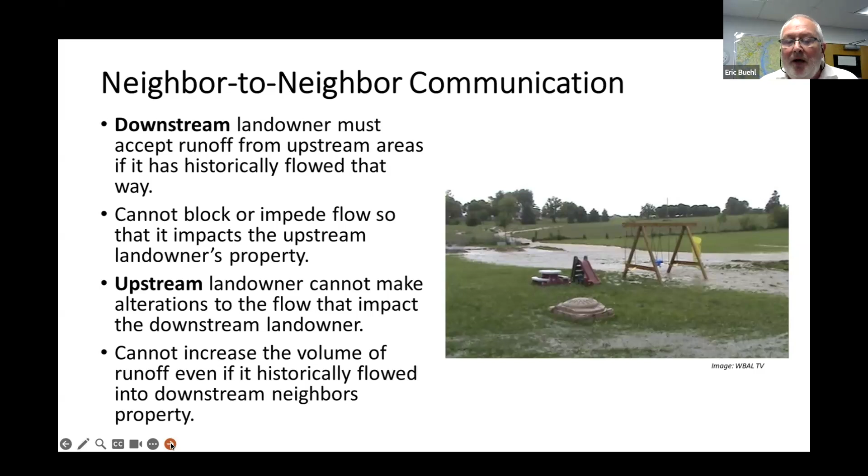And this is where you get into the impervious surfaces. And folks, Takoma Park, by the LIDC plan, is 43% impervious. There is a lot of hard surface out there. But if your neighbor upstream decides they want to extend their patio and expand their driveway and things like that, that will increase the volume or the amount of runoff coming down. And they can't do that to you. So I guess next slide.

So this is where it comes to neighbor communication. The first thing you've got to do is look around your own property.

And Steve and Rob, I'm about done here. I think I got about 5 seconds left.

The last thing you want to do is just go up to your neighbor and say, you're causing problems here, when it's your own downspouts that are ponding water and things. But if you do have a problem, go talk to your neighbor, meet with them, explain to them what's going on. And it may be a simple fix. Missy showed that picture with those flex tubes extending the downspouts like 50 feet or so. Well, those things can be turned in other directions. Maybe they can send it into their lawn instead of your area. So you do want to talk to them.

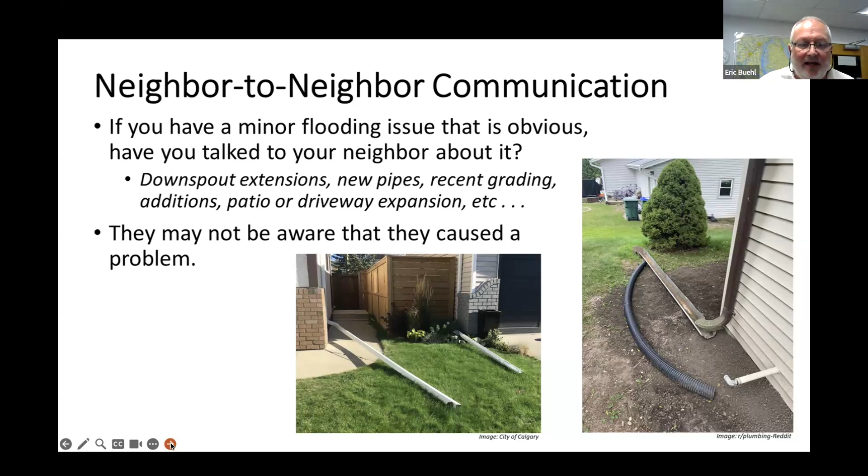You want to rule your property out again, so that it's not the cause of the problem, and you're not going to have egg on your face when you talk to them. I think this is my last slide, isn't it?

Yeah. So in closing on this, TSS, I think, has an opportunity to help look at some of the stormwater projects on private property. The city may not have the staff or the ability to go on that. And again, they've already got some priorities, but look at getting grants, making landowner contact, maybe helping to get landowner permission to move forward, and taking that LIDC plan. The LIDC plan is a really good starting point, but it'll be over with at some point, and you need to be ready to move on to the next phase.

So some of those grants that I mentioned on the first page or the second page fund that sort of work. They'll do the assessments. You hire engineering firms to come in and do that sort of work. So with that, I'm going to yield back the rest of my time to the good gentleman from Takoma Park.

Eric, profound thanks for your spirit and for all the work you're doing. It's inspiring. I'm particularly interested in your coverage of the groundwater problems. I've heard it many, many times from people, the mystery, and looking at buried streams will help us sort it out. It's a starting point for actually understanding what's going on.